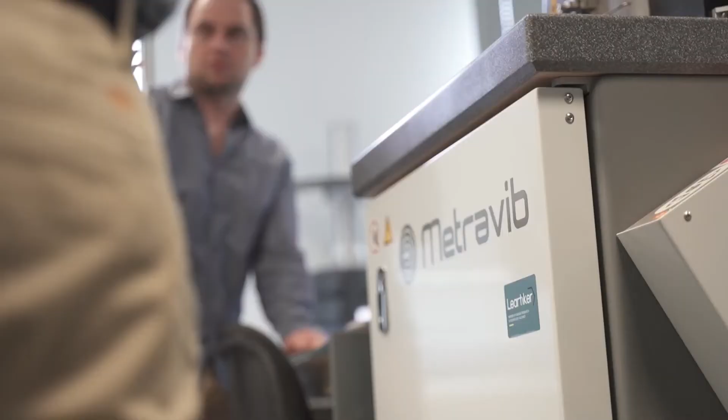So we are in the third day of the DYNAeLAST program. Remember that during the last 2 days, we have organized, together with Metravib, a specific training session related to elastomers and dynamic properties. It has been a nice experience, and the companies that attended this training session had the opportunity to learn about the theory behind the dynamic properties of elastomers, going deeper into the modelization of these properties, and also a practical session with their own materials on our Metravib DMA machine.

While you are now watching a video related to the workshop, the training session. Aiseti, could you make a small summary of the different points that you have seen in the training session? Yeah sure, so as José Javier Egurrola has also explained...

The DYNAeLAST event, the course, and also these expert talks, for us it's a networking opportunity. During the course, we have involved different people, from more industrial companies to more research-related companies. The main aim was to give not only a theoretical course, but also a practical course to see the potential of the dynamic mechanical analysis.

How can we use the DMA not only to understand the basics of elastomeric materials, viscoelasticity and their behavior, but also to apply dynamic mechanical analysis and the different tests we can perform in order to model their behavior, to get material models able to predict the performance of products that are mainly in cyclic loading conditions.

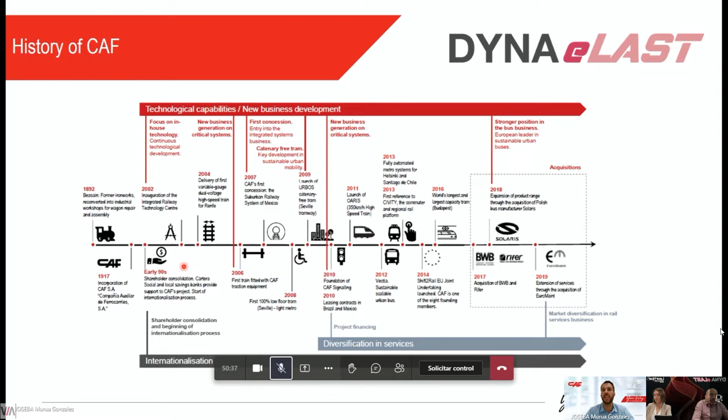But in the early 90s, after a strong and painful crisis in the state, CAF needed to diversify and internationalize. So there was a shareholder consolidation process, and since then we've gone through very quick growth, sometimes very inorganic, and now on top of doing trains as our original goal, we do everything. We do buses, we do even financial services, we do infrastructure, we do signaling, and we are involved in a lot of different areas.

As for products and services, railway vehicles are still our core product, and we have high-speed trains, regional and commuter trains, metros, tramways, and even locomotives. But since a few years ago, when we bought Solaris, an electric bus company in Poland and European leader, we also do buses. We also offer services, even financial services. We do signaling, which is a big thing in railway. We do all sorts of components. And the big thing right now is integrated transport systems.

As our slogan shows, we say 'your way to future mobility.' We don't want to be just a manufacturer of a transport system, but we want to give you a mobility solution from A to B, an integral solution. It can be bimodal or trimodal, multimodal transportation that combines a train, a bus, and a taxi, and we want to have the capability to develop the infrastructure for that.

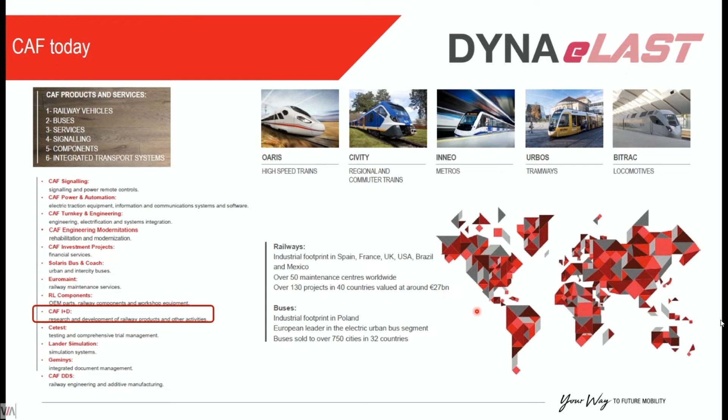So there are a number of companies that make up the CAF group. Particularly, I am in the Research and Development Department, I+D for its Spanish acronym. We have a very strong international presence at the moment, with manufacturing and maintenance centers all over the world and projects on all continents as well.

A brief introduction to the train suspension and running dynamics. The bogie is essentially the chassis on the train. This is what supports the car body and makes the link to the track.

There are usually two suspension stages on a train: the secondary suspension, which links the car body to the bogie frame, and the primary suspension, which links the bogie frame to the track. Usually in a train, wheels are metallic, so they don't offer a suspension characteristic, although we do have elastic wheels as well.

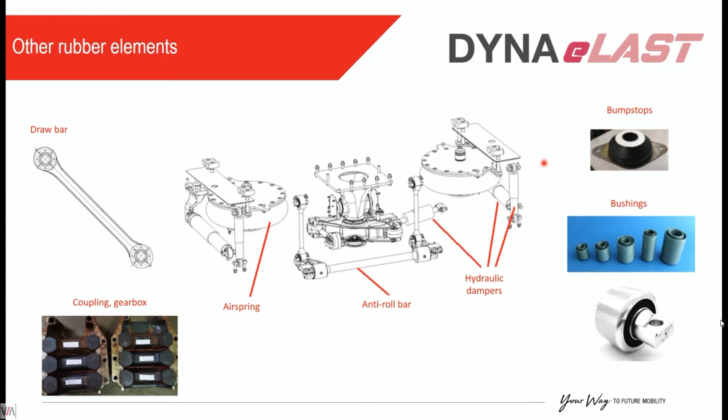Crash course on running dynamics. When we design a train, we need to ensure that it is safe, that it's comfortable, and that we minimize the life cycle costs because of damage to the track.

In the context of a European project, DynoTRAIN, different rubber model options were used for train suspensions - different Kelvin-Voigt, Zener, different combinations, more or fewer elements. Lots of them were analyzed. In-house, we also developed our own model, called a Berg model, and we got very good agreement for various challenging calculation scenarios. We compared testing to simulations, and got very good agreement. So it can be done, for sure, it can be done.

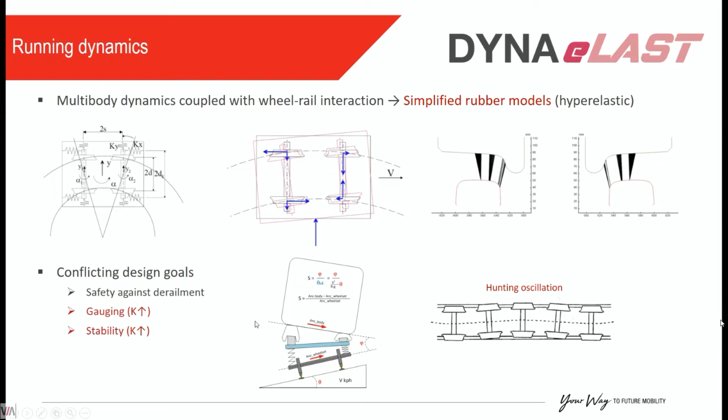In most cases, or in many cases at least, you would want a relatively low stiffness to delay this as much as possible. And then I wanted to reflect on this final design.

It's not really a design goal, but it's more a design restriction, which is space. We can account for this, and we can create a very complete and detailed technical spec, but then in practice, we have very limited space to obtain what we want. So this is a problem usually for our manufacturers, for our suppliers, because we are requesting something that is essentially

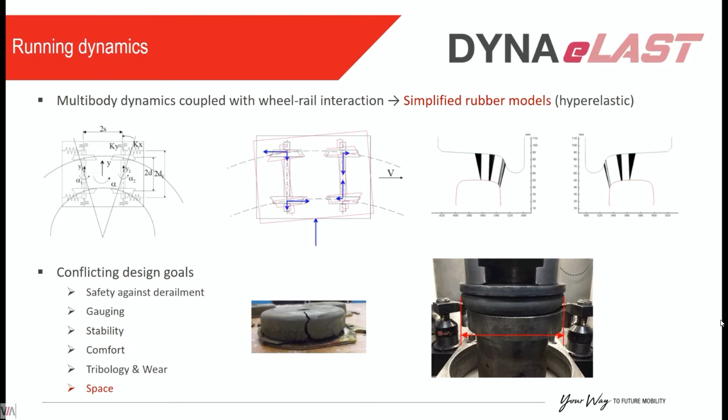So this is a bit more context regarding service life, which obviously rubber is a light material. Everyone here knows that, so this doesn't come as a surprise, but it really affects the safety of the train. When we manufacture a train, usually the life expectancy is 30 years, which is a very long lifespan. And it can even be more, because sometimes after circulating for 30 years in Europe, for example, it can be taken to a developing country to extend its lifespan.

For rubber, we usually consider 8 years of lifespan, but during those years, the operating conditions change significantly. On the one hand, you have external conditions to the rubber itself, like wheel rail wear that I mentioned earlier, or other suspension elements failing or aging, like dampers. This means that the rubber might need to absorb higher deformations or higher loads than it was originally designed for. And then, of course, we have the unpredictability inherent to the rubber.

We have, on the one hand, wear and tear. Well, just for the purists, I've used a classification here that it's useful for us, for CAF. We are not rubber experts, so perhaps there might be some disagreement on how I classify this, but it is just something that is useful for us, okay?

So fatigue, well known. I'm sure that Wilmars will tell us a lot more about fatigue, so I won't talk about what I don't know, but essentially this is a test we have about an anti-roll system articulation bushing, where we see how the stiffness varies as a function of the cycles that are being applied. So there is a drop in stiffness. Usually in this range we don't have a functional problem, but it might become a problem beyond that.

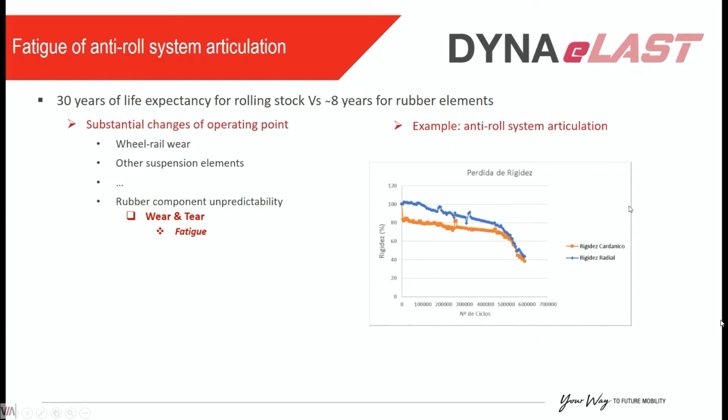We also have creep, particularly in the primary suspension. This can be very critical. The primary suspension settles, so this is a test according to the standard, where we see the evolution of the settling of the creep, and then this is the prediction for 10 years of lifespan.

We've had cases in which the creep was excessive. You consume the travel allowed for the suspension, and you might end up having problems with metal-to-metal contacts. If you don't have enough travel distance for your rubber suspension, you get to metal-to-metal contact, and that can be extremely dangerous from a safety point of view.

And then we have a couple of other effects, oxidative aging, and then what I call load-induced stiffening. This load-induced stiffening is specific to the rubber springs, and when I've asked about it and talked about it, some people find it a bit surprising. So I'll try to explain what it is about. The name, I don't really know another name, so that's why I call it load-induced stiffening.

What it refers to is that if we do, this is a force deformation curve of a quasi-static test of a primary suspension. The blue curve corresponds to the new element, to the new part, and then we apply cyclic loading. Both dynamic creep and fatigue tests are cyclic loading tests, and what we see is that the element stiffens. Then we put it into an oven and it stiffens further. So this last part is what everyone, I guess, is familiar with.

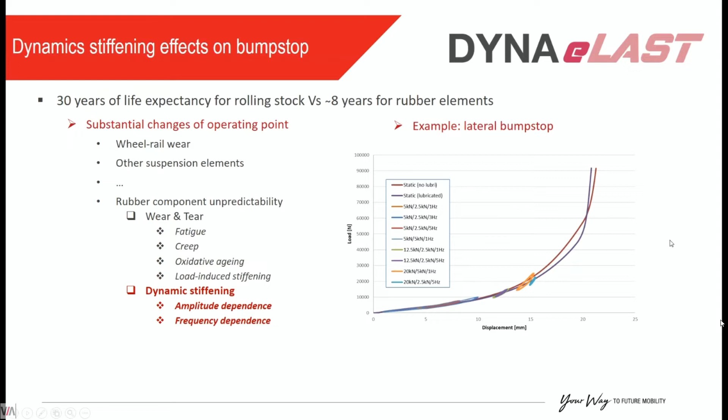Dynamic stiffening, I won't talk much about it since you've been in the course and know this already. There is a high dependence on amplitude and frequency. If we look at this variation of the vertical stiffness, we see that the stiffening can be more than 40%. From a safety point of view, this is tremendous because the derailment coefficient I showed you earlier would increase dramatically with such a stiffening. So it is critical for us.

Loading conditions also play a major role. If we look at these quasi-static curves overlapping with the static ones, and we draw the tangent, which is essentially the value we use when evaluating our safety, what we see is that if we go from EL0 condition, no passengers whatsoever, and we move to EL7, which is 7 passengers per square meter, the slope of the tangent has changed significantly.

So it is a lot stiffer in this particular case. If we look at some bar charts, what we see is how from EL0, as we increase the number of passengers, the stiffness increases a lot. From a safety point of view, EL0 condition tends to be the most critical because it's the lowest load on the train, on the wheels, but because the stiffness increases so dramatically depending on the preload, this could become the most dangerous condition.

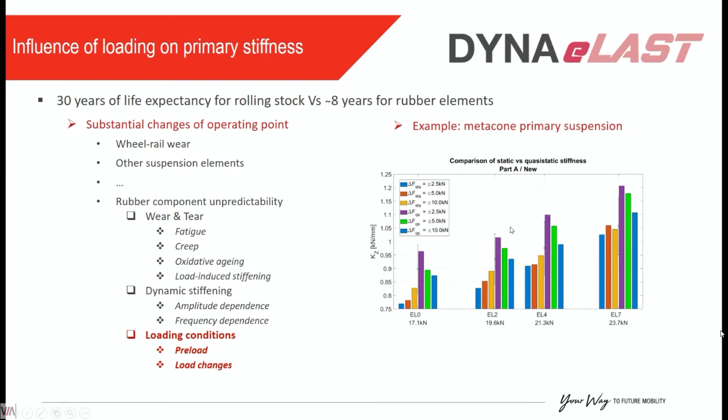I also wanted to make a mention of environmental conditions. Obviously rubber is subjected to different environmental conditions. We have projects where it is very cold, very hot, sandy environments like Saudi Arabia, and very corrosive environments in coastal areas with a lot of salt, or snowy conditions where they put a lot of salt. We've experienced problems of adhesion loss between rubber and metal in these very corrosive environments. Thankfully, our supplier Metalocaucho has found a solution for this, and now we do have a solution, but this is the type of problem we experienced in the past.

So just to give you a couple of application examples of projects we are undertaking, like I said, we have this problem with the load-induced stiffening in the primary metacones. I'll try to give a high-level presentation of this.

This project was undertaken by ITA. They were the ones that carried out the work, and Metalocaucho provided the material. Just as a reminder, I'm talking about this element, the primary spring, a rubber metal component that is in the primary suspension joining the wheelset to the bogie frame.

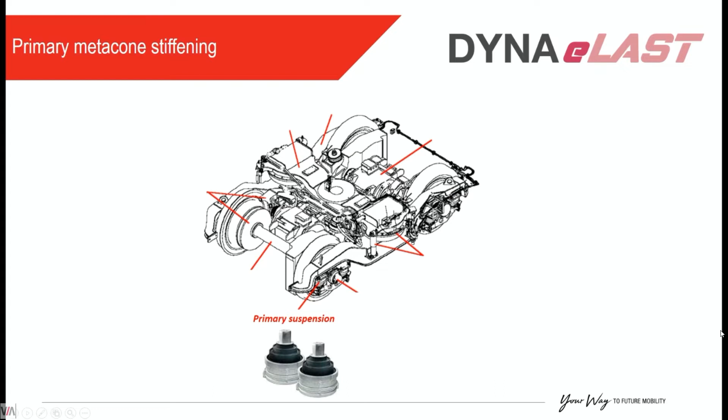This suspension undergoes creep and oxidative aging during its lifetime, but it also experiences this load-induced stiffening. To evidence this, I have these force deformation curves of elements that were new — this would be the nominal new state. Then we have curves for parts that are 10 years old, some of them in a warehouse and some in service. The ones in the warehouse stiffen, which is something to be expected since time goes by, but they are still within tolerances. But if you look at the ones that have been under cyclic loading, in operation, they've stiffened a lot more — they even go beyond tolerances. This is not a problem though, because they were already out of service, being 10 years after manufacturing date. But this shows how this stiffening effect is actually something we observe.

If we look at a fatigue test of a different element, we see how the stiffness increases as the number of cycles increases, and how the creep also increases — the primary settles further and further. We think it's a combined effect, and we need to deal with it. We need to limit the total stiffening to a 30% maximum, otherwise we will have a massive risk of derailment. This, of course, constrains the design.

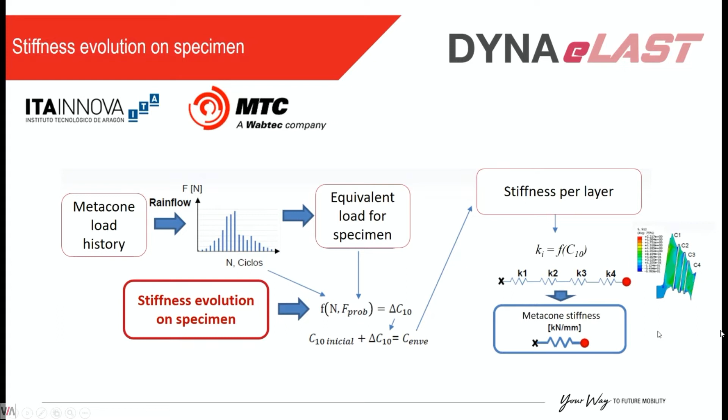So for the stiffness evolution of the specimen, we use a quadruple shear specimen. The model of the material is actually rather complicated. I won't go into the details because I don't understand them, but we have an elastoplastic branch, we have a viscoelastic branch, but we only take into account the evolution of C10 in the hyperelastic branch. So we can track it as a function of the cycles being applied.

It changes based on the amplitude of the cycles and on the preload that the element is subjected to. To determine the equivalence for the specimen, what we do is ensure we take into account the stresses on each of the layers of our element, and we replicate those in our specimen, and that's how we have our equivalence. We have our diagrams to be able to apply the correct loading to the specimen. And finally, once we can predict the evolution of C10, we can, through finite elements or whatever, get the stiffness for each of the layers. We can combine them to get the metacone stiffness.

So I would say I didn't give you too much because I cannot at the moment. I think it's a very promising area of research. It is quite fascinating, but we have still some way to go to be able to refine the whole methodology.

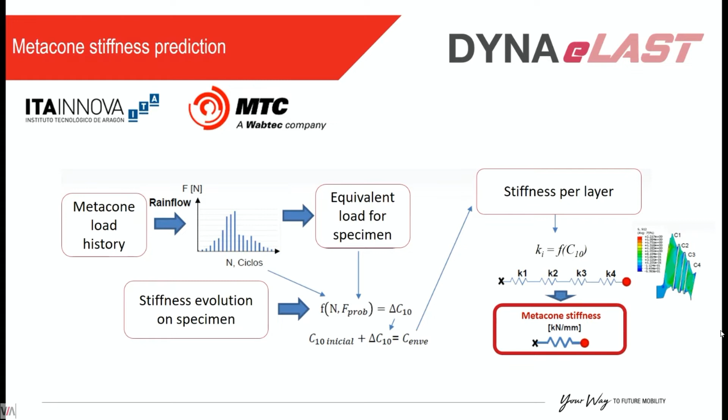An example: anti-roll system fatigue testing. So I gave you an example of something more numerical, and now I wanted to give you a test of a real component. In this particular project, we've worked with both Leartiker and ITA. We have two different experimental setups - I'll give you the details now - and also Metalocaucho has provided the material and the components for the testing.

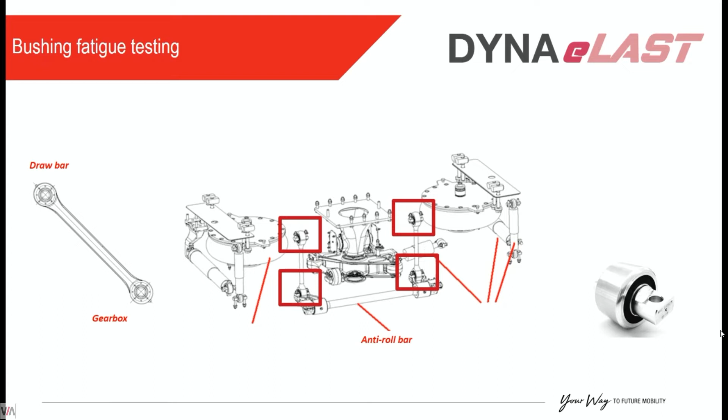So again, as a reminder, we have our anti-roll system on the train. There are bushings on the articulations, rubber bushings, and those are the ones we are trying to analyze. Why? Because we've seen cracks appear in some of the projects. These cracks are not a functional problem. We haven't really experienced any safety issues, but if a customer sees them, usually they don't like seeing cracks and they ask for a solution. So we had to deal with it.

But apparently in some projects that does occur. There are projects in which the track is very stringent for the suspension, so we have track twists that are very high, and very narrow curves. They also tend to be corrosive environmental conditions, particularly in coastal areas. So it doesn't happen often, but when it happens, it is because of a combination of all this. To be honest, we can't really design for this, but the poor maintenance of the tracks is usually beyond what we can do.

So we need to deal with it when we have the problem. Originally we didn't really pay much attention to these elements. They are not safety critical, but as we started having problems and customers complaining, we needed to pay more attention to them. So we tried to understand the problem. It is a multi-axial loading scenario where we have very high radial loads, very high angles, both in torsion and in conic or cardanic axis. And what we saw is that the peak values of all three of them occur at the same position.

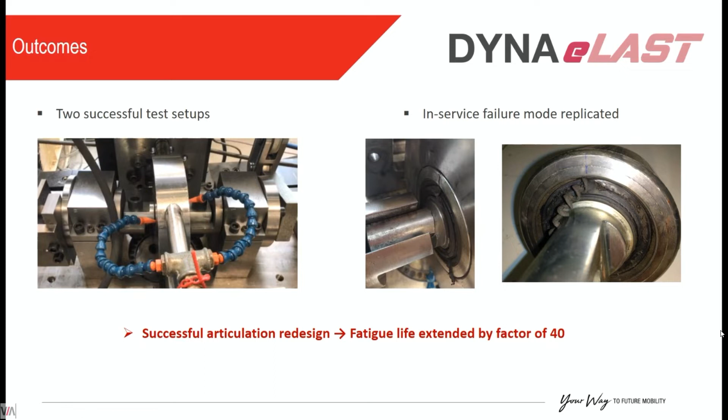So I'm running over time already, so I conclude the presentation.

Rubber is a crucial element in rolling stock, and we've learned it the hard way. From being non-experts, knowing basically nothing about rubbers, we've had a very steep learning curve because of problems we've experienced in service. Obviously, it is known that rubber is a live material, and you have to deal with it. In our particular case, it affects critically safety, comfort, and life cycle costs.

This uncertainty makes our life a bit difficult because it requires very high safety margins. Sometimes it leads to unrealistic design specifications, and we make the life of our suppliers miserable by requesting something that cannot be done in practice.

And on top of that, we also penalize performance at nominal conditions, because we've experienced projects in which the stiffening on the primary was above 30%, but we also have projects where we've observed a stiffening of the order of 10%. So considering a 30% really is penalizing a lot the nominal condition in cases when you don't really have this stiffening.

Just a couple of areas of further work. We carry on working with the primary metacone stiffening, but another big area of interest for us is condition-based maintenance. Direct monitoring would provide a lot of very useful information if we were able to know the loads that our primary suspension are subjected to, or the stiffness at a given time.

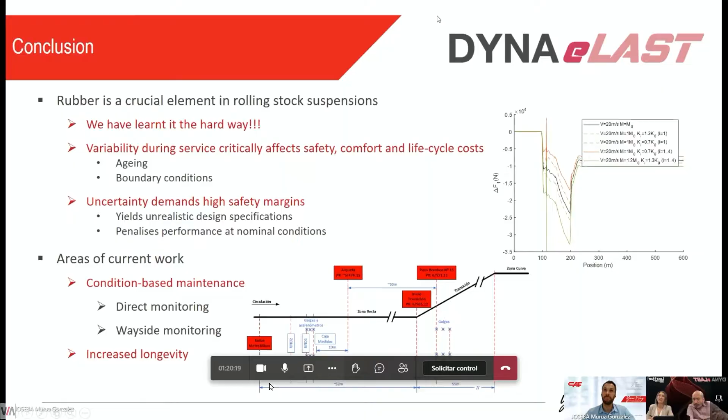Covering a lot of topics related to elastomeric materials, modeling, characterization issues, topics we have also covered in the course related to DMA, all the modeling strategies. You talked about the balance between the complexity of the models and the accuracy, covering hyperelasticity up to viscoplasticity models, which are the most advanced material modeling to predict the nonlinear behaviors we can have in the products. At the end, you gave a picture of how these material models can also be applied at a product level. Very, very interesting presentation.

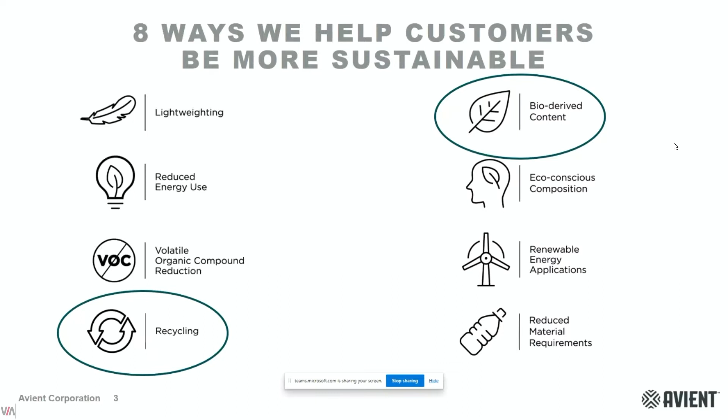Through the 8 ways that Avient is making to help customers be more sustainable, today we will see solutions based on bio content and also solutions related to recycling. We have solutions with recycled content, and we even have some solutions that allow customers to make the final parts more recyclable.

Why do we have more and more available solutions and more developments ongoing? These are the main reasons. The first one is the side of the end customers.

Customers are more and more conscious of the CO2 footprint of their consumption of parts and materials. They are more focused on green solutions, more open, and prefer these kinds of solutions more and more. This means that when buyers are thinking of buying a new product, they prefer more and more these sustainable solutions, which can play a key role in marketing differentiation.

The second reason is government and regulation pressure. We have more and more norms, standards, and regulations, including tax increases related to prime solutions. So recycled content is a way of ensuring we are in line with this pressure and these regulations.

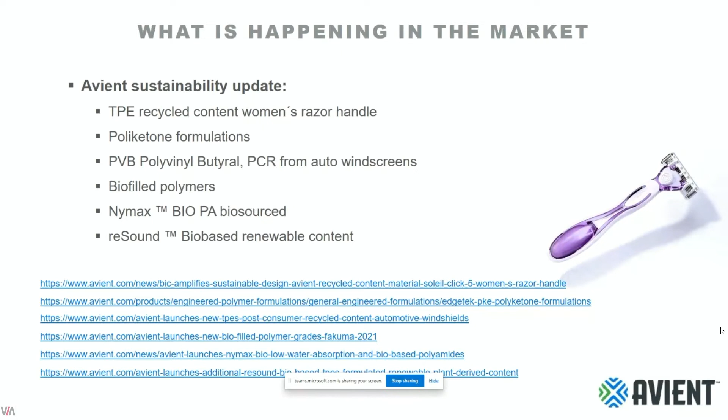We have the new TPEs with PVB, polyvinyl butyral content, coming from auto windscreens - we'll see that at the end. We also have bio-based polymers, both in the resin base and in the fillers, including new NYMAX grades that are polyamides based on biosourced materials, and also reSound grades with bio-based renewable content. You can see the links below to dig deeper into further details.

The bio-based TPEs we have, as mentioned, include solutions suitable for overmolding on PP and ABS. Within these solutions, we achieve a high content of biosourced raw materials for production. The application can be widely used for personal care, household appliances, consumer electronics, and packaging, and they deliver performance at the same level as prime solutions.

That's a key question, because at the end we search for sustainability, but also achieving the right level of performance that allows us to deliver the right engineering solutions to our customers.

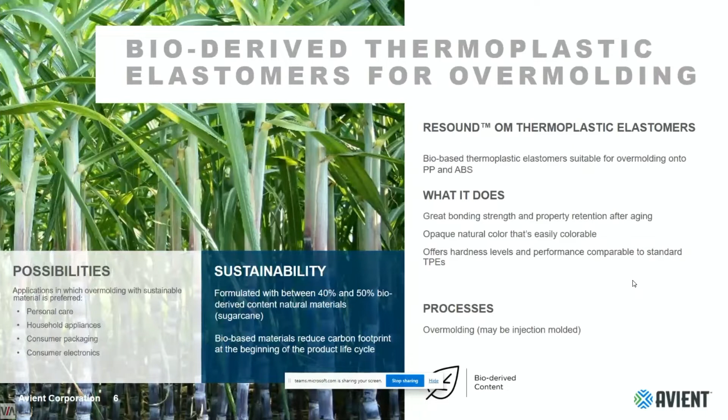Within this portfolio of bio-based TPEs, we achieve a high percentage of bio content, from 30 to 60% bio-renewable content. Also a wide range of hardness, from 30 to 70, with good UV resistance and good adhesion to the TPU base in case these products are overmolded.

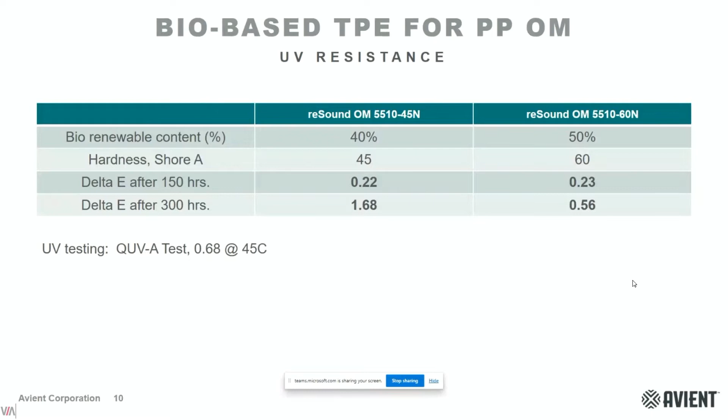That means that the performance you can achieve initially will withstand the weeks and the aging, with proper aging and property retention.

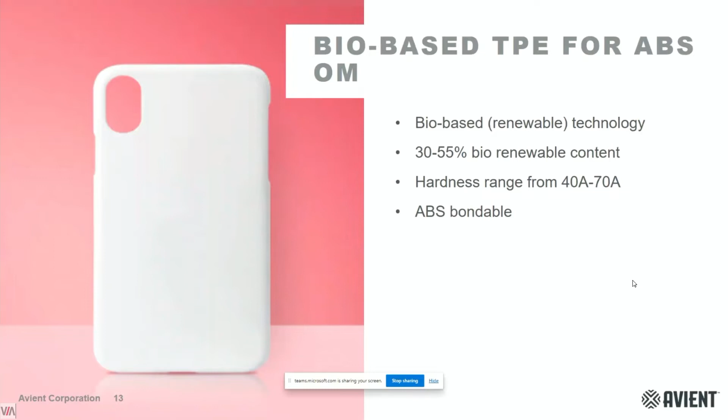We also have bio-based TPEs that are suitable for molding with ABS and styrenic substrates, also with a wide range of Shore A from 40 to 70. Here again you see an example of one of our available grades in Europe, with a 55 Shore A solution in natural.

We have also measured the bio content within our formulations to compare the theoretical bio content established in our production against the real value of bio content in our materials. For that, we performed this ASTM test to measure the biocarbon inside the material. As you can see, in all cases we are slightly above the theoretical bio content, so it's more than a theoretical declaration—it's a real value of bio content within the materials.

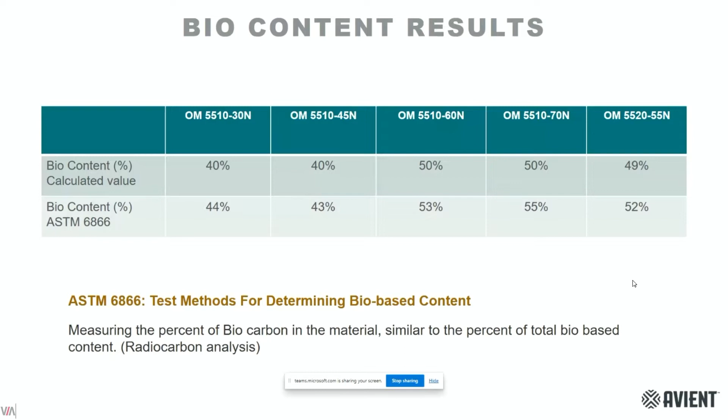To end this part of the presentation, here you see two examples of biosourced TPEs suitable for certain food contact applications. The first one on the left is suitable for some yogurt applications, and the one on the right is suitable for cosmetic applications. If you have a project, it's up to us to check with our regulatory team whether the proposed solution is suitable for your applications.

The most frequently asked question related to these materials is that when people hear 'bio,' they think of biodegradable materials. That is not the case—as we've seen after the aging test, these solutions show good property retention, so they are not biodegradable, they are biosourced. We use, as the initial feedstock for our compounding production, biosource raw materials coming from renewable sources, from plants, and that way we achieve the right level of sustainability.

We also determine bio-based content using radiocarbon analysis. And now we can offer you an estimation of the CO2 footprint for our materials, allowing you to estimate the CO2 footprint of the material and, accordingly, the final part.

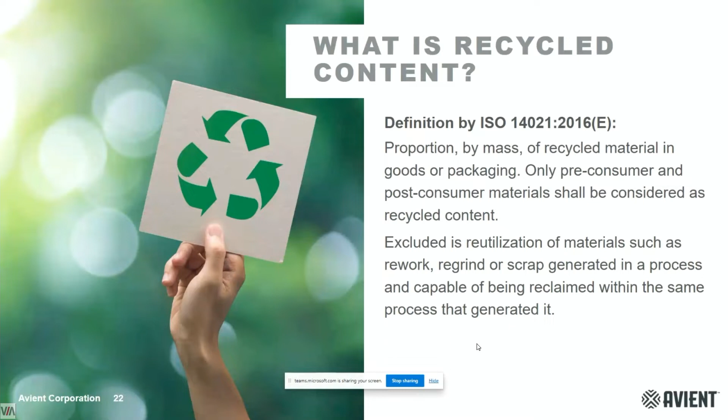By definition, per ISO norm 14021, recycled content excludes the reground scrap generated within the transformation process. If an extruder or injector recovers material and parts, regrinds them, and reuses a certain percentage to continue producing parts, that falls outside the definition of recycled content. This is a common, sustainable practice for a traditional injector or extruder if the quality of the final part allows it, but we cannot consider this as recycled. Per this ISO norm, we can only consider pre-consumer and post-consumer materials as recycled.

The materials, once transformed into parts, have a life cycle, and if everything goes well, at the end of the life cycle of the products, these materials are recovered, transported to the recycling agent. They have a selection, cleaning, and then a transformation into the form of suitable materials, and that way we can get post-consumer recycled materials that are materials coming from existing parts that have suffered all the agents along the life cycle of the product.

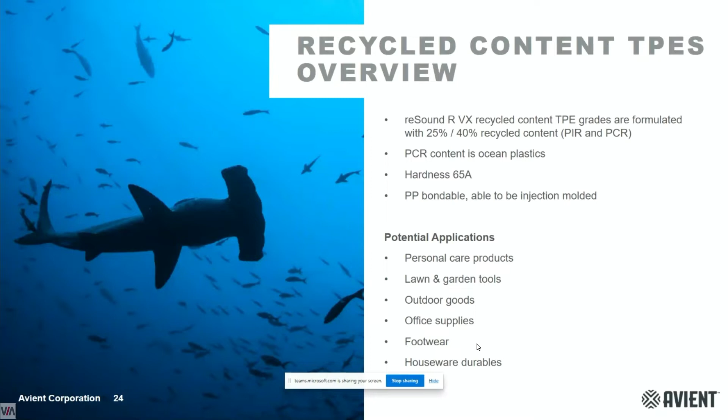The post-consumer content we have in some solutions is ocean plastics. That's why you see a shark on the screen. We have an example with hardness Shore A65, bondable to PP, suitable for injection. And the potential applications, as you can see, cover all kinds: personal, consumer, footwear, houseware, durables, and so on.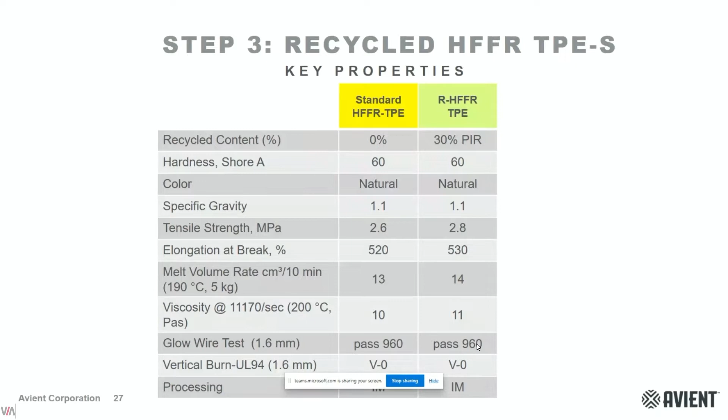And the last, but not least, I'd say, is our most recent family of products of TPEs with recycled content. And as you can see the source of the recycled content, in this family of reSound R, we use PVB that is reclaimed from broken automotive seals and laminated architectural glass.

The really good point here is that we can achieve circularity for this product. That is the inner layer in windshields that gives the right properties in order to avoid a break of glass parts within the vehicle. That could be a safety issue. And up to now, the only way...

...of these windshields, and you have to bear in mind that each year around 75 million windshields are wasted, the only way was to scrap them at the scrap yard and leave them there without any added value to this material. This mix of glass and PVB made it, up to now, not suitable to recycle.

But we have succeeded in getting the right collaboration with a company that delivers us the PVB content from these windshields, and that way we give added value to this waste, and we reduce it. This is a much appreciated thing amongst the automotive industry, which is willing to increase the recycled content and also increase the circularity of the products.

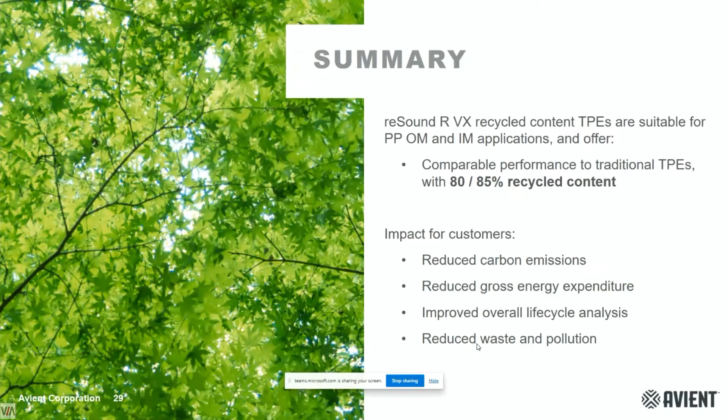As you know, energy has an increasing cost, and it has a big impact on the price of the materials and so on the parts and the final product where they are assembled. And the customers, the companies, and the governments are willing to get more sustainable solutions with an improved life cycle analysis, and at the end to reduce waste and pollution thanks to our products.

And some frequently asked questions.

We can offer you most of our standard grades that are standard for the automotive industry, packaging industry, and so on. We can offer these grades that are already on the market, that already have their place, but with recycled content. After all the knowledge we have developed in all these materials, we can gather the knowledge and experience we have with the existing TPEs and mix it with the knowledge on the sustainable raw material source.

We have a high recycled content up to 85%, where we have a mix of post-industrial and post-consumer. In order to maximize this recycled content, we have a mix, and in some cases we can give you an estimation of the mix of the PIR and PCR, but it's a mix of both.

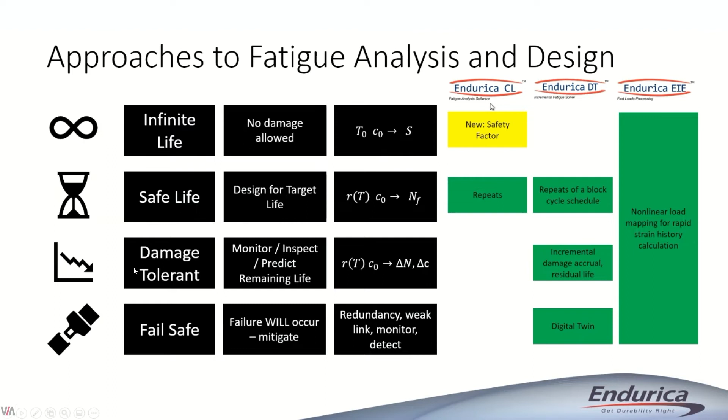So what I'm showing here is a mapping between these different categories of approaches and the different software tools we develop. We have 3 software tools: one is CL, one is DT, one is EIE. Each of these fatigue solvers solves a different type of problem, but you can see here how they map onto these categories. If you want to do infinite life, there's a new feature in CL that will calculate your safety factor, and that's what I'm going to talk about in this talk. For the safe life approach, you could use either CL or DT. DT is if you have a block cycle schedule—you could model that and calculate repeats of the whole schedule. But today we're going to talk about infinite life analysis.

So all of these approaches are built around the idea that your material, even when it's brand new, is full of microscopic features that under cyclic loads can grow and develop as cracks, and that development is also manifest as changes to the stiffness of the material. All of these approaches involve the necessity of measuring the crack behavior. We have to know, with regards to crack precursors, how big are they at time 0—that's a very important characteristic. It's governed by things like the ingredients of the rubber, the type of polymer, the manufacturing process. But bigger crack precursors lead to shorter life, smaller crack precursors lead to longer life.

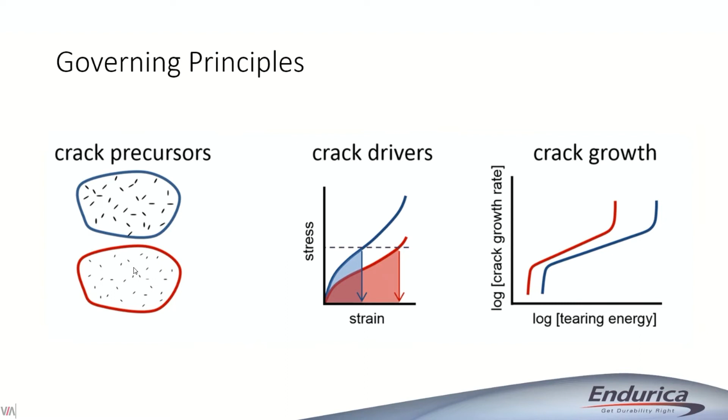And if it is, how fast does it grow? These are the big questions that all of these approaches are founded on. Now, if you look specifically at the crack growth rate curve for an elastomeric material, this chart here kind of shows the typical behavior that we observe over a very wide range of rates.

A couple of important features on this curve. The x-axis is what we call the tearing energy. Basically that's a measure of how hard you're pushing the crack, right? So higher loads, higher strains, that's higher tearing energy.

Crack growth rate, that's how quickly the crack is developing. The upper limit is what some people call the tear strength or the rupture strength, TC, the critical tearing energy. If your tearing energy exceeds the value of TC, then what you have is a crack that grows very, very rapidly, so rapidly that it's not a fatigue problem anymore. It's a strength problem.

Rubber has a tear strength, and that's kind of the upper bound of the crack growth rate curve. Now there's also a lower bound, and this is what we would call the fatigue limit, T naught. That's a value of the tearing energy, and if you're below T naught, at that point you're not supplying enough energy to the rubber or to the crack, there's just not enough energy to break polymer chains that cross the plane of the crack, and so the crack can't grow.

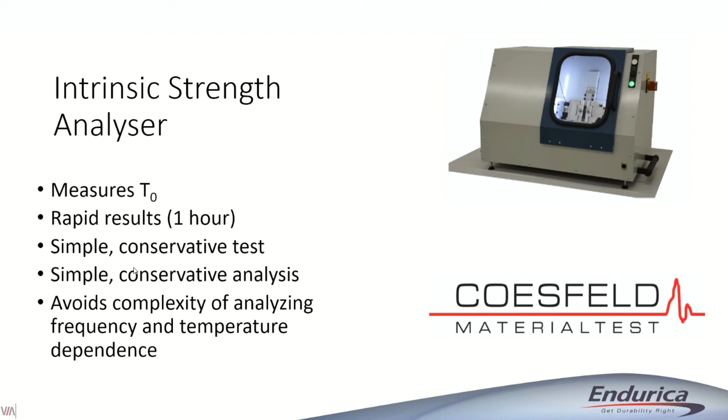Funny story here. We once had a client that wanted to measure fatigue in the electronic space. They were working on an elastomeric speaker cone, so they were worried about fatigue at very high frequencies, like 10,000, 20,000 hertz. If you've ever tried fatigue measurements at those frequencies, you start to worry a lot about how much stroke you can get and how much power you have to feed into the machine. What we ended up doing for that customer was using this intrinsic strength measurement. We just said, look, it's really hard to measure at that high frequency. Maybe we could just make sure that we're below the fatigue limit, and that way you've got infinite life, and you can stop worrying about frequency and temperature. So that was an approach that worked in that particular case.

Now, the procedure that this instrument uses was pioneered by Graham Lake and Oon Hock Yeoh. In fact, I believe this was Oon Hock Yeoh's PhD thesis. The method is based on cutting the rubber with a very sharp razor blade. When you look at the test, sometimes people scratch their head initially because they're like, wait a minute, this is not a fatigue test, and that's right. It's not a fatigue test. It's actually cutting the rubber with a very sharp razor blade.

The blade is instrumented so that we can measure the forces that act on it. We use a blade that's as sharp as you can possibly get. It's a blade from a microtome, so it's nanoscopic sharpness. And the idea in the experiment is to drive the blade through the rubber at a series of different conditions.

There's a matrix of things that we do, but when we push the blade through the rubber, we do that with the rubber stretched and strained a little bit. Typically we'll do this under a series of strain levels, maybe 4 strain levels. At each strain level, we go through a schedule of different cutting rates.

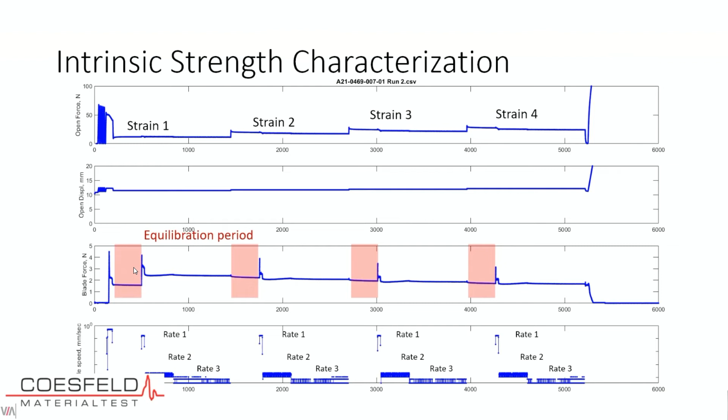The grommet is a very inexpensive component, and a lot of times the engineers working on these don't have the scope in their projects to do a full characterization. But measuring the intrinsic strength is certainly doable.

So that's what this material is. Now, when we run these measurements, typically what we'll do is we'll run two materials: the material being characterized, and a control material. I'll talk about why we do that in a minute.

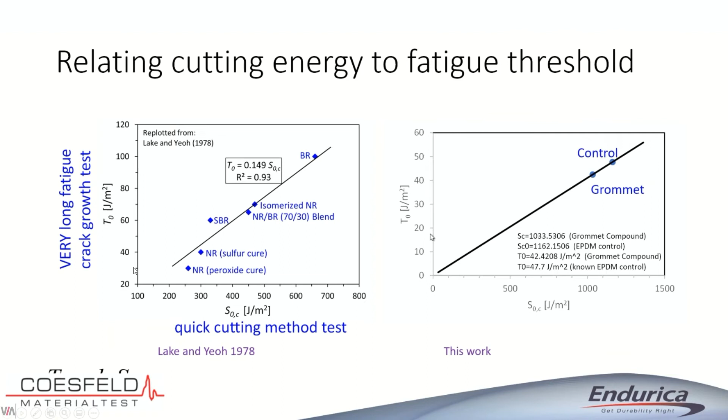Now you could say, well, okay, it's fine to read Lake and Yeoh's old paper, but has anybody ever repeated that work? For the first few years of this, we got that question a lot, so we finally did go and repeat this work, running a very long crack growth test.

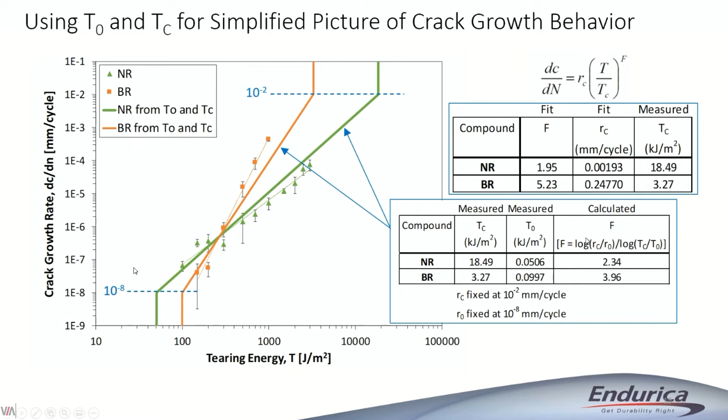So in this case, for the natural rubber and butadiene, we have these values for the threshold and these values for the tear strength. If you take Robertson's rule and calculate the slopes based on these assumptions, these are the calculated slopes we estimate. For natural rubber, which had an actual slope of about 1.9, we end up with an estimate of 2.3. For butadiene, which had an actual slope of 5, we predicted a slope of 4. So not perfect, but if you want to measure these things in an hour—say you're comparing 10 compounds—this is a very rapid way to make quick estimates and down-select which materials you'll work with in the long run.

So the practice we recommend to people is to think of this intrinsic strength as a low resolution version of the crack growth rate curve. If you measure T0 and TC, that puts you in a position to get a rough picture of things. If you want the detailed picture you'd use in a full deep safe-life analysis, you'll need a fatigue crack growth test system. But if you just want to do compounding type studies, low resolution is sometimes enough.

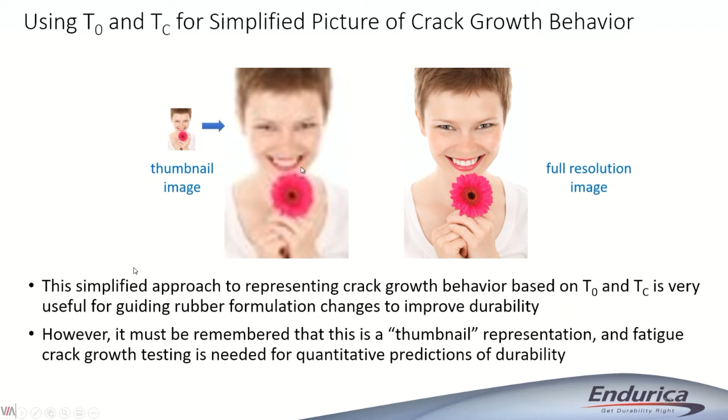Okay, so that's Robertson's rule. And that's basically what I wanted to say about materials characterization.

Now I want to switch topics a little bit and talk about, okay, so you've measured your intrinsic strength. How do you use that in analysis? The analysis is actually very simple. We're just going to compute the ratio of the threshold to the energy release rate that occurs for a crack in your material, in your application.

For each of these orientations, we ask what's the ratio - if I calculate the energy release rate for that crack and compare it to the intrinsic strength, what's that ratio? We make a search to find the orientation of crack that minimizes that safety factor, because that orientation is the most critical. This is what we call critical plane analysis, because we're searching for the particular crack that experiences the worst load case, the one that minimizes this safety factor.

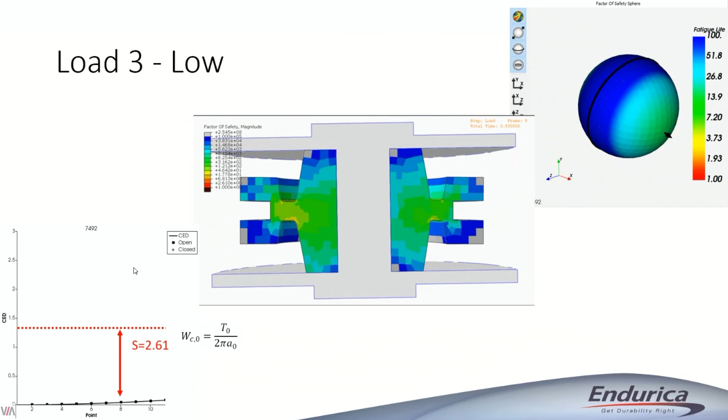For the moment, ignoring aging - aging can change the threshold, so you do have to think about that. But anyhow, so that's the small load case. Here's the medium load case.

Here's the high load case. Again, this one's not going to be infinite life - we're exceeding, we're going below the fatigue threshold.

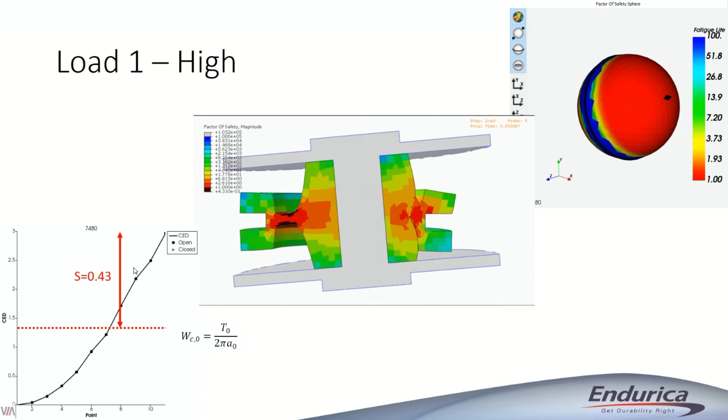The safety factor is 0.43. So basically you're not getting infinite life out of this. So we would have to go to a safe life approach. So that's an example for the grommet.

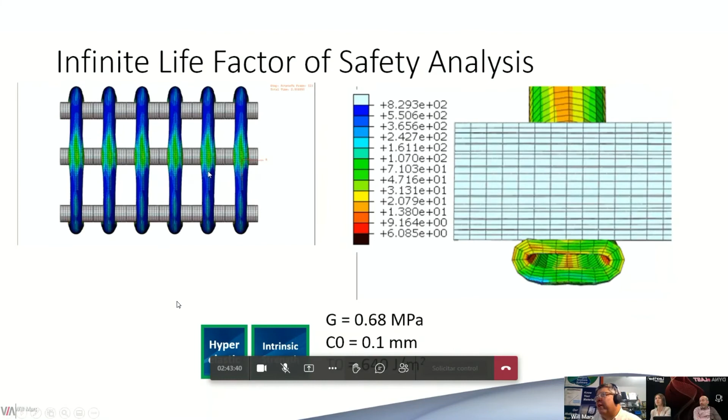Another example would be a fertilizer squeeze pump. This is an ag application. Basically, you've got fertilizer in these tanks, and you need to pump it out onto the field. The way the pump works is these tires drive a roller. The roller rolls over these hoses, and when the roller rolls over the hose, it pulls fluid along. Here's an animation of the rollers rolling over those six hoses, and you can see it pinches off the cross section and pushes fluid through the hose.

We've made a model of the hose here. This is a zoom up of just the section of the hose that's getting crushed. You can see there's a stress concentration on the inside diameter of the hose. We've done the safety factor analysis here and learned that we have a margin of about a factor of 6 for this hose. So again, very simple analysis.

As soon as somebody raises their hand and says, well, how long does it last, then you've got to actually do a deeper level of characterization and analysis. But yeah, very simple thing. So that's kind of an introduction to the idea of intrinsic strength and its utility.

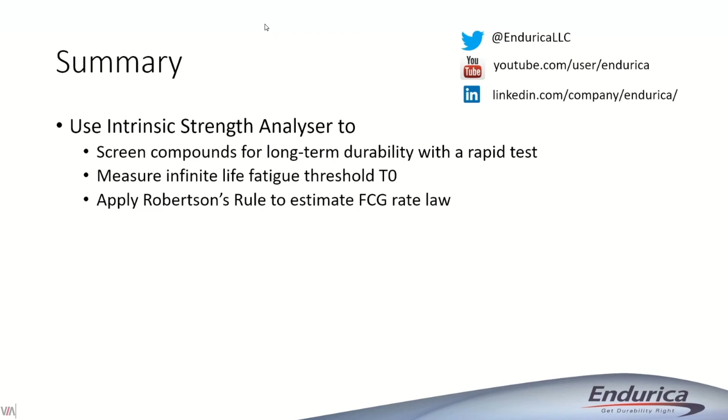I guess I'll stop here and just say that the intrinsic strength analyzer is great, it's great as a screening test. It's great for getting this T-naught that you can use for doing the infinite life analysis. You can use it with Robertson's rule. So I'll stop here and take questions.

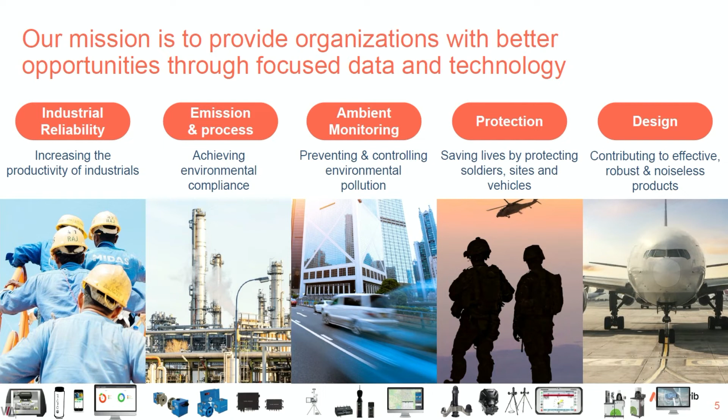Our mission is to provide organizations with better opportunities through focused data and technology. We have several business units in ACOEM: one focused on industrial reliability, another on emission and process ambient monitoring, protection - that's a defense activity, we work with Army all around the world - and the last one, but not least, a design business unit, Metravib, contributing to effective, robust, and noiseless products.

Just to focus on this activity, two branches: first is an engineering group, expertise in the field of noise and vibration engineering and material testing. Our goal is to provide industry and research laboratories DMA instruments for all characterization of thermomechanical properties of materials. Our customers are focused on transport industry, aerospace, oil and gas, engineering, energy, etc.

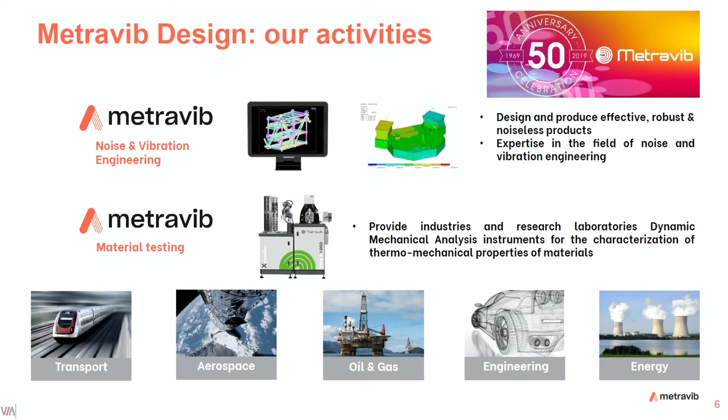Just a brief focus on our DMA instrument range and applications to give you some idea. We propose three families of DMA. First, low force DMA with DMA 25 and DMA 50, a very cost-effective instrument, easy to use - just a simple electric outlet, and you can perform all classical DMA tests you want.

Another family, the DMA Plus series, three different instruments: DMA Plus 300, DMA Plus 1000, and 2000. The 300 is maybe the most polyvalent machine we can propose. DMA Plus 1000 is focused on polymer, composite, and elastomer fields, and DMA Plus 2000 is mainly dedicated for the tire industry. With this DMA Plus series, you can add an automated system with an expander, and we can propose more than simple DMA characterization, such as fatigue capability, fatigue testing with heat buildup, and of course crack-growth testing.

Finally, we can propose another kind of DMA named VHF104, for very high frequency, 10 kHz. This is a specific DMA instrument in order to have direct characterization up to 10 kHz.

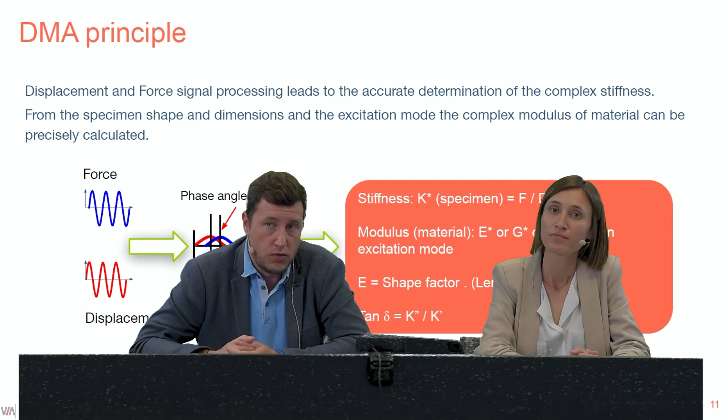From the specimen shape and dimensions, we can compute the modulus — Young's modulus if working in tension-compression, or shear modulus if working in shear excitation. Tangent delta, representing the damping properties of the material, is just K double prime divided by K prime, or E double prime divided by E prime, to give an example.

We propose several excitation modes depending on the nature of the material to characterize. For rubber, we mainly use compression, tension, but also shear mode, double shear, or shear for film. For the polymer industry, we can use tension mode and bending mode — 3 point bending, double cantilever, or 4 point bending if fatigue capability is needed. We can also measure bitumen, paste materials, metals, alloys, glass, and ceramics — a lot of different materials according to these various excitation modes.

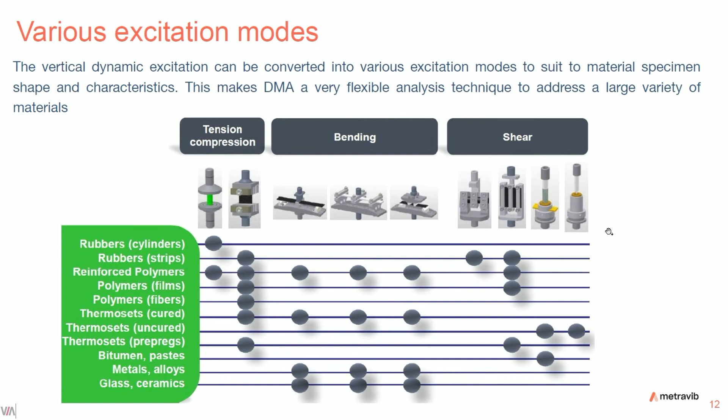And the last one, frequency sweep — the behavior of the material as a function of frequency, from very low frequency up to 1000 Hz as an option on the DMA Plus series instruments.

So here we are talking about crack growth testing. We propose a new product, available for one year now, an automated system to characterize crack growth rates. This system is available only on the DMA Plus series — DMA Plus 300, 1000, and 2000 — because we use a specific software for that named Multitest, instead of DYNATEST which handles standard DMA characterization.

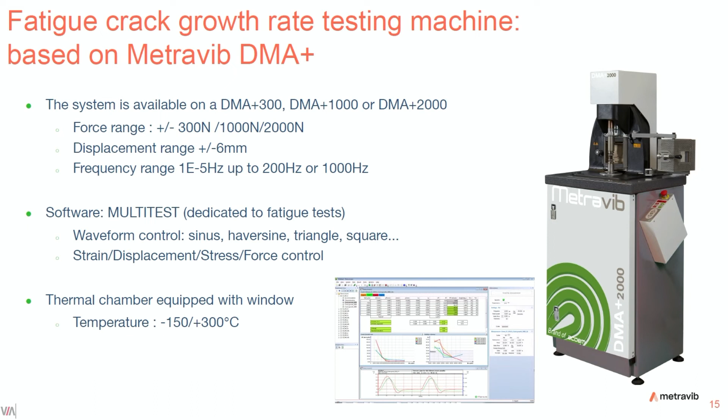So what is a crack growth system? This is a picture of a DMA including a dedicated optical system. Here you have the specimen — we have different sizes of specimen, pure shear specimens with a width from 40 millimeters up to 80 millimeters. The thickness is at maximum 2 millimeters, and the height between grips is 6 millimeters.

In this picture, the DMA used is the Metravib DMA Plus 2000, that is, plus or minus 2000 Newton, plus or minus 6 millimeters, up to 1 kilohertz, with waveform control, etc. We use a dedicated optical system composed of a micrometric motorized table, a high resolution camera, and lens magnification, allowing us to follow the crack tip with precision up to 5 microns.

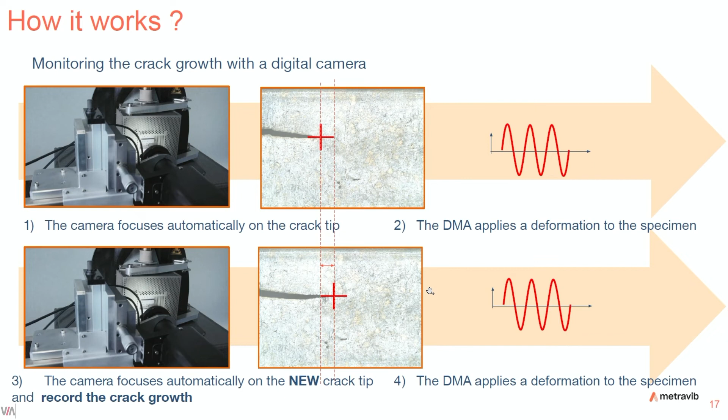So how does it work? First, the camera automatically focuses on the crack tip — you have an example here. Once that's done, the DMA applies a deformation to the specimen, for instance a sinus signal. Then the camera automatically focuses on the new crack, and once again the DMA applies a deformation and records the crack growth. So the system is quite simple.

Just to summarize, crack growth test needs a 3 different step process. The first step is a stabilization test, in order to apply a certain number of cycles at one frequency at one strain amplitude, in order to avoid any Payne and Mullins effect, essential to take into account the pronounced hysteretic behavior of filled rubber compounds. The second step is the characterization step.

The aim of this step is to get the relationship between the tear energy, G, as a function of the strain. G is actually fully independent of the crack growth length, and it can be characterized before cutting the specimen. The characterization test consists in applying a strain sweep from low strain up to the highest strain amplitude to be applied in a crack growth test.

The G-curve obtained can allow a smart comparison between various rubbers and various elastomers in similar testing conditions.

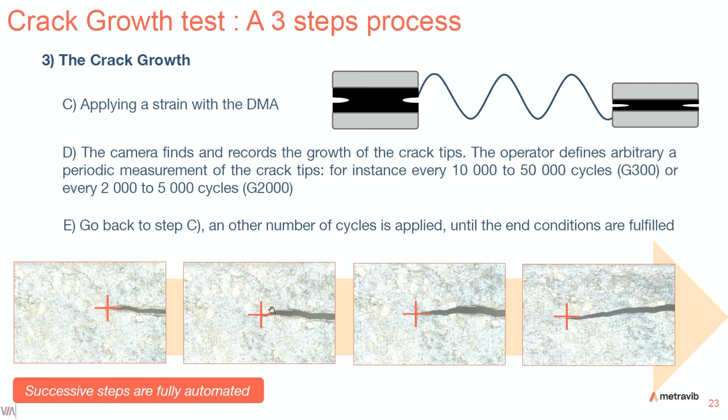These successive steps are fully automated. Just to sum up, crack growth measurement is performed as follows: apply a short preliminary cyclic test to blunt the crack tips, stop the excitation after a programmed number of cycles, apply a programmed static force or strain to open the crack.

Target each crack tip and take a picture. Process the image in real time to obtain the crack tip position or coordinates, store each crack picture systematically, and restart the excitation. We can restart the excitation with an amplitude of 80% from the memorized waveform before the previous stop.

So the whole process is fully automated. Just to give you an example, in order to follow 4 cracks at the same time, the duration of the crack growth measurement sequence is about 50 seconds.

This is especially relevant when using non-molded specimens in tensile grips, where the risk of specimen slippage is much higher.

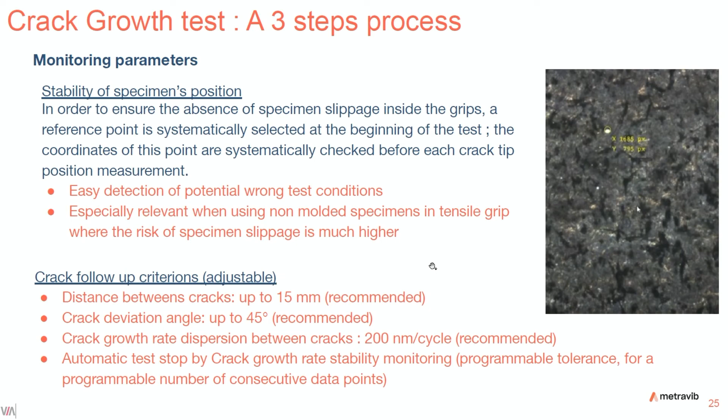So this was just the introduction. I would like to show some experimental results, what kind of curves we can obtain with this system. The curve I will introduce was shared by ELASTCP, a French group, with Nathan Céleste, the engineer in charge.

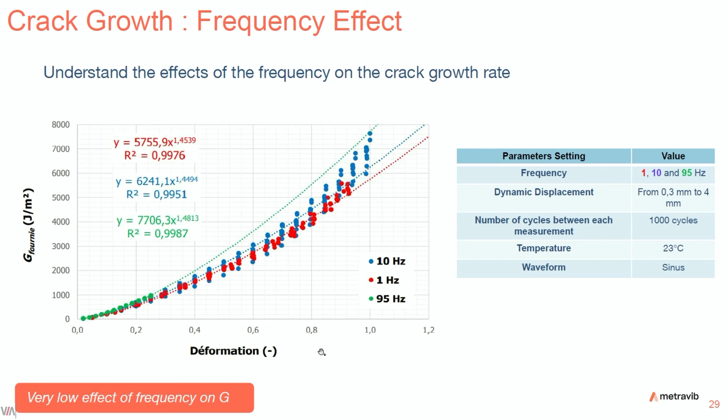What about the frequency effect? Let's look at the understanding of the effect of frequency on the crack growth rate. First observation: we have a very low effect of frequency on the tearing energy G. Here you have 3 curves in 3 different colors for 3 different frequencies: 1 Hertz in red, 10 Hertz in blue, and 95 Hertz in green.

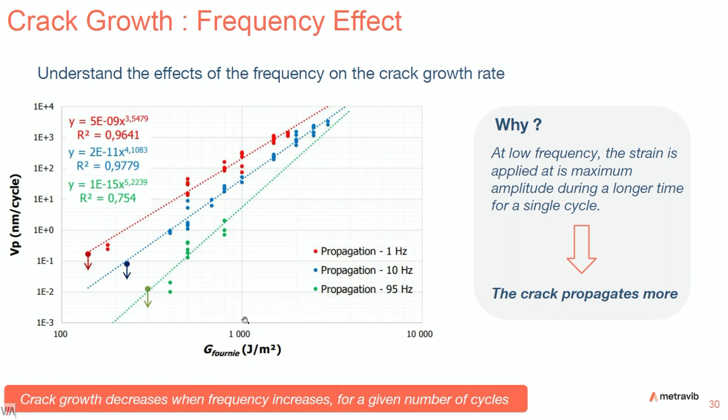The curves are really close for the same condition, so very low effect of frequency on G. However, what about the crack growth rate? Of course, crack growth decreases when frequency increases for the same number of cycles. Why? Because at low frequency, the strain is applied at its maximum amplitude for a longer time during a single cycle. So for one cycle, the crack propagates more. But in relative time, the length of the crack is much higher at high frequency than low frequency. For one single cycle though, it's not the same conclusion.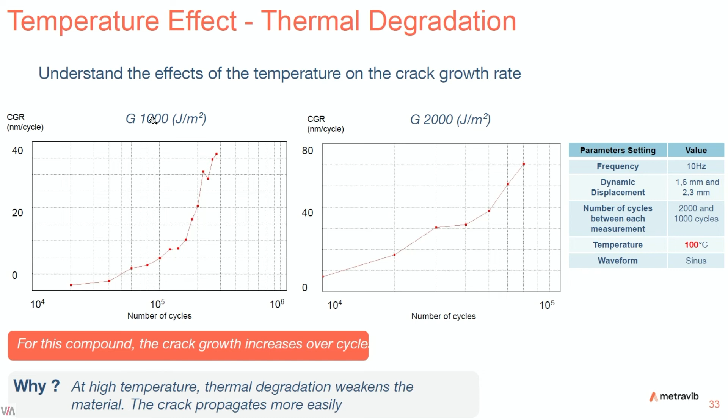As a conclusion, tests were performed on rubber materials, and results have shown that at low temperature, crack growth rate reaches a constant value. The rate versus the energy follows a power law. The crack growth per cycle is important for low frequency, and the crack growth rate increases with temperature, and of course at high temperature, thermal degradation leads to faster crack growth.

Some insights: understanding the waveform effect on the crack growth could be interesting. Studying the correlation between the modulus, tangent delta, and crack growth rate could also be interesting. And studying the crack growth rate among different rubber compounds, of course.

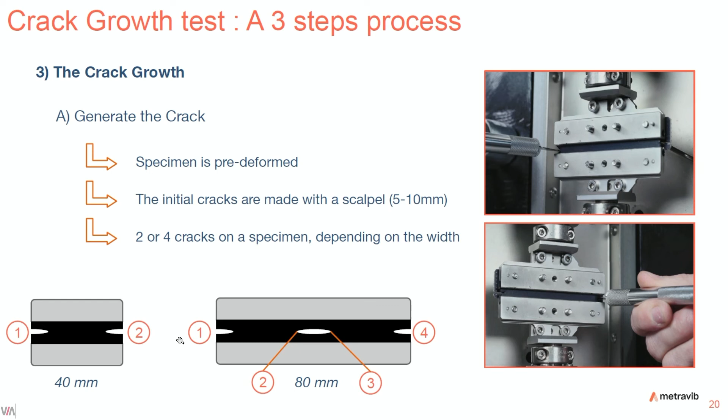Interesting. So you increase the efficiency. Exactly, yeah, you are more productive. Perfect. So I don't know if you have any other questions from the speakers. If not, we can now...

We will need to change, because Brice needs to leave. So José Javier Segurola is going to join. Thank you very much, and we keep in touch. Of course, we remain available for any further questions. Thank you very much, Leartiker. Thank you, SAT. Thank you, Brice.

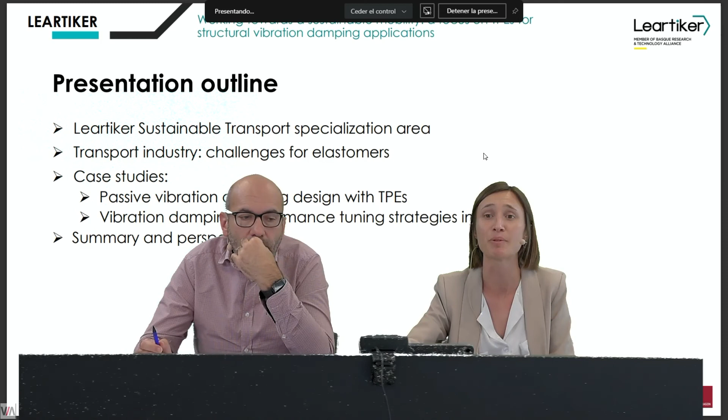And then I will go more in detail through the two case studies or research projects that I will present. The first one is related to how to improve the structural vibration damping capability of high stiffness products or materials by means of the incorporation of TPE materials. And then I will also introduce some research activities we are performing in terms of how to personalize or tune the vibration damping capabilities of TPV materials, which are a special class of TPE materials obtained by blending thermoplastic with rubbers. And of course, at the end, I will summarize a bit and talk about some perspectives.

In the sustainable transport area that we have in Leartiker, we perform research and development activities in order to transfer to the transport sector and industry the most advanced expertise and knowledge related with the design and development of lightweight, reliable and silent polymeric structures, and of course, how to digitalize their behavior by means of advanced material modeling and techniques. Inside this sustainable transport area, we research in different fields of applications, mainly three kinds of polymeric materials: sheet molding compounds, thermoplastic composites, and elastomeric materials.

But regarding elastomers, all the research activities that we perform are focused on advancing the use of elastomers in demanding dynamic applications, mainly focused on new mobility issues and problems. For that, we work and research in what we call properties-driven strategies, so strategies that are aware of the process-structure-properties relationship in elastomeric materials.

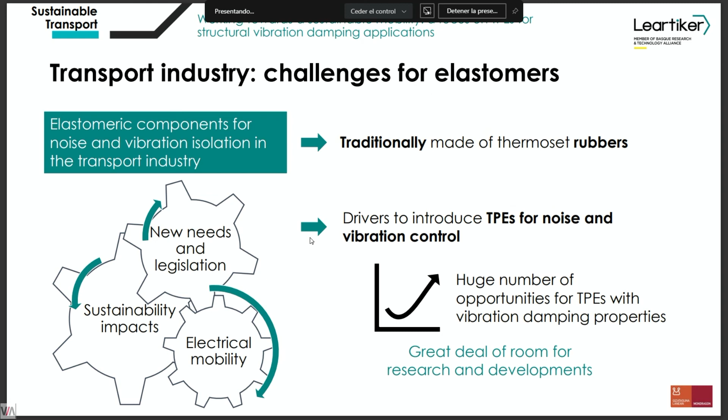So a huge number of opportunities arise when looking at the contributions that TPEs can have for such kinds of applications. And of course, there is a huge deal of room for research and developments in this area. So the two projects that I will show are related with this: how to introduce TPE materials to overcome all these challenges and how to optimize the behavior of the material and products by means of these strategies that we are working on at Leartiker, these properties-driven strategies.

So in the first case, as I said, the objective was to investigate passive solutions to improve the noise and vibration, mainly structural damping, and how to decrease the noise performance of transport industry structural components. For that, we designed some bimaterial structures by combining high stiffness material.

In that case, we worked with SMC materials, sheet molding compounds, which are very interesting materials in terms of mechanical and thermal properties, but they have some issues related with structural damping due to the high stiffness of these materials. So in this project, we combined this SMC with a viscoelastic material, in this case a green viscoelastic material, so a TPE material.

As I mentioned, SMC has this relatively poor vibration damping at room temperature mainly, due to, as we will see later, the high glass transition values of these materials. We combine SMC with TPE for improving or targeting improvements of the vibration damping at room temperature.

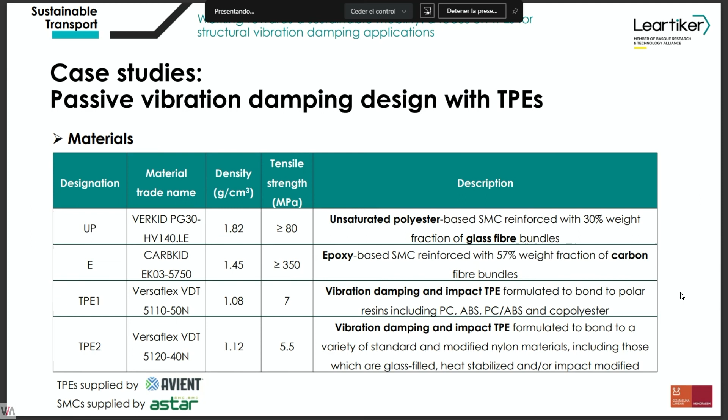So in that case, the idea is to bond a viscoelastic layer to a stiff layer. When this structure suffers bending mode, the viscoelastic layer is able to dissipate energy and give the structure this vibration damping capability.

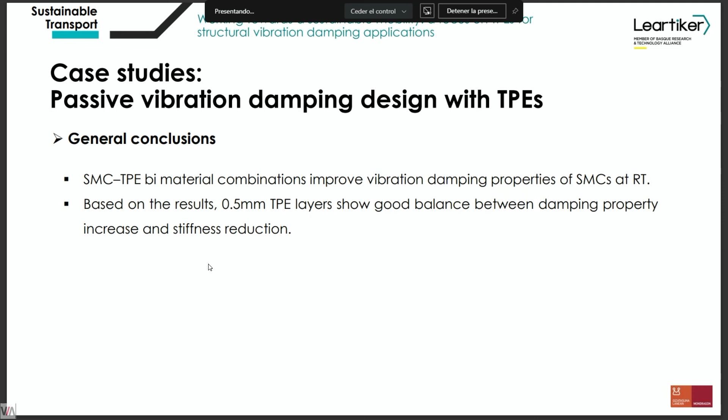Okay, so now let's jump to the second case study or research project. This is related more with the strategy I was talking about at the beginning, this properties-driven strategy, so how the process can influence the microstructure of the materials and how with this we can tune or personalize the final properties of material and also components.

So in that case, what we did was investigate the anisotropic microstructure and properties of injection molded thick-walled TPVs. Why thick? Because as we mentioned, we want to replace elastomeric materials by TPEs in anti-vibration components. So bushings, top mounts, these kinds of components have very thick wall thicknesses. It's interesting to analyze the effect of this also, because at the end we would like to close the loop and be able to predict the properties also at the product level.

As I said, usually this vibration dampening is achieved by using elastomer-based components that have tailored geometry and tailored static and dynamic mechanical properties. So for that, the interesting thing would be to select elastomers with personalized or tunable dynamic stiffness, static stiffness, and also hysteresis. Why hysteresis? Because the hysteretic heating is also related with the fatigue or long-term dynamic mechanical behavior of this kind of material.

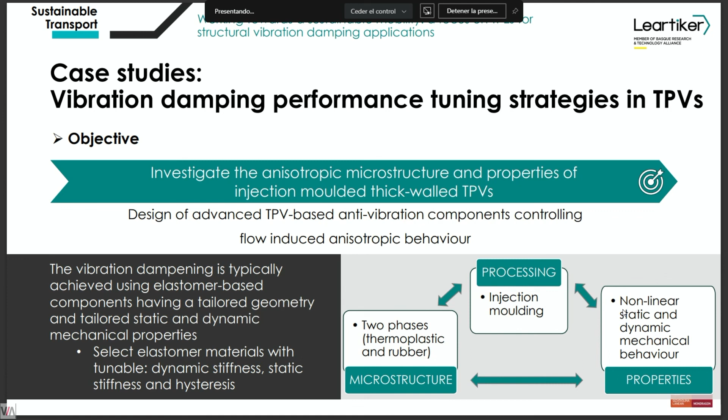So in that case, for this specific research project, we used 3 different PP-EPDM Santoprene TPVs with different shore hardness, because it's interesting to analyze the effect of hardness on their final properties. Usually for anti-vibration components we are targeting shore values of 60, so soft materials, but it's interesting to analyze other ranges for other kinds of applications.

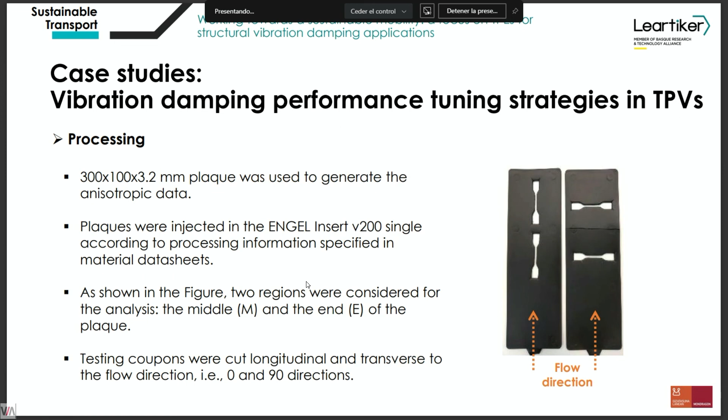So now I will present the key findings that we obtained in this study.

One key performance that is very important when we want to replace a rubbery material with a TPV material is the elasticity or permanent deformation, because these TPV materials have a thermoplastic as a matrix—in this case, polypropylene. So we'll have plastic deformation, but for anti-vibration components, we want good elasticity, meaning low permanent deformation values.

So it was very interesting to find that at low hardness values, which are the ones most interesting for the final application of these anti-vibration components such as bushings or tow mounts, we obtain improvements in the elastic recovery, in this case in the transverse direction. That means if we can control the process and microstructure in injection molding, we can obtain products with better elastic recovery ability.

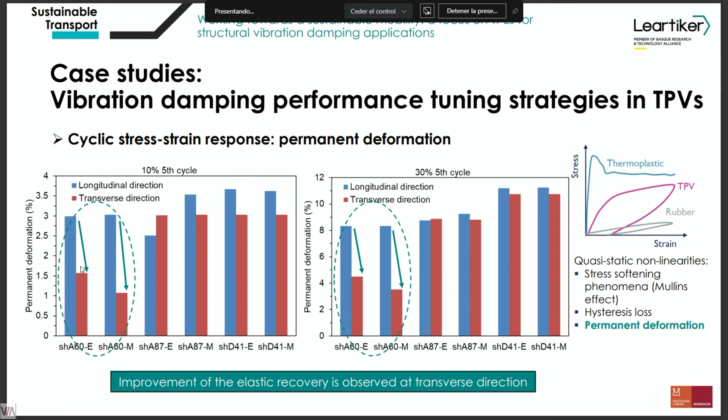Then, for this kind of component, it's also very important to control the effect of frequency. So, as in the other case, we performed frequency sweep experiments and analyzed the relationship between the storage and loss modulus.

The storage modulus, or G prime, gives information about the energy stored in the material and the tendency to demonstrate elastic behavior. The loss modulus, or G double prime, is related to energy dissipation capability and the tendency to demonstrate damping or vibration dampening behavior.

It was also very interesting to find that at low Shore hardness, Shore A60, we are able to somehow customize the dynamic mechanical properties of these materials. That means if in the final performance we'd like different ratios between static and dynamic stiffness, or different loss factors or damping capabilities, we should be able to achieve this if we control the process and the final microstructure—optimizing and customizing the final properties at material and product levels.

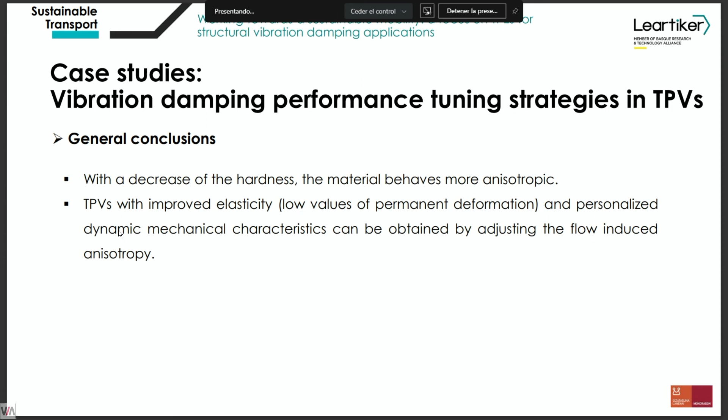We think there is room here to research and improve the performance of TPV materials—improving their elasticity in terms of low permanent deformation values, and customizing or personalizing the dynamic mechanical characteristics by adjusting this flow-induced anisotropy, essentially controlling the processing and microstructure.

As a summary or perspective, regarding how to improve structural dampening of components by adding TPE—these passive vibration dampening strategies with TPEs—I think this study opens new prospects to design lightweight, multifunctional components for modern transport applications, particularly for applications facing both damping or resonance issues and challenging mechanical requirements, such as car grounds, car roofs, or aircraft wheel components.

And in terms of TPVs and their anisotropic behavior, this study demonstrates the advantage of introducing this anisotropic behavior of TPE blends into TPV-based anti-vibration component design and optimization strategy—being aware of the microstructure and how we can use this to optimize the final properties of these kinds of components and materials.

So I have finished. This is what I intended to present and show you today. Thank you all, and I'm open for questions.

Thank you very much for your nice presentation, and thanks for showing the relationship between formulation, material processing, characterization, and how everything influences the design of a new part. So now we can open a discussion. I don't know if anyone in the audience has a question.

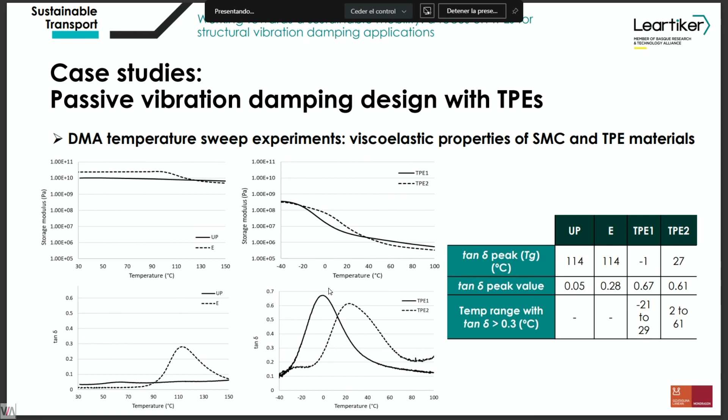Another way to see how these materials will behave at low temperatures is by using the time-temperature equivalences, a modeling strategy we have also been explaining at the course. This means the behavior at high frequency is somehow related with the low temperature properties we will obtain with these materials.